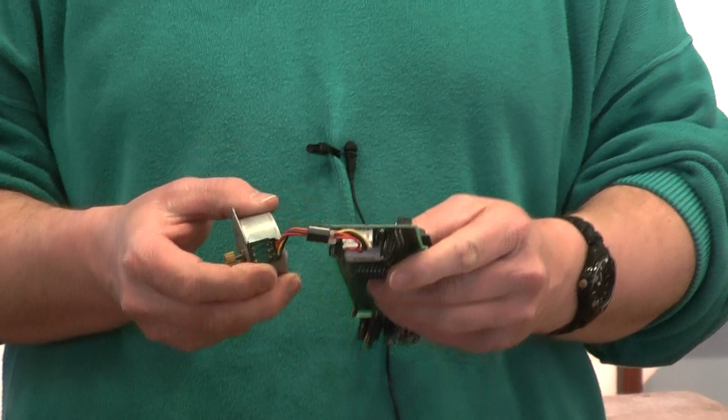Today we're going to look at stepper motors. You might find a stepper motor in your scanner. This is from my scanner, which I destroyed when I got my all-in-one printer, and I took the stepper motor out. Some things to notice: 4 wires. There are 2 phases in the stepper, and there's a plus and minus for each phase.

How do I know it's a stepping motor? Well, one simple test is to just feel it. As you turn it, it feels like there's kind of grit or sand inside of there. So I know for sure that's a stepper motor.

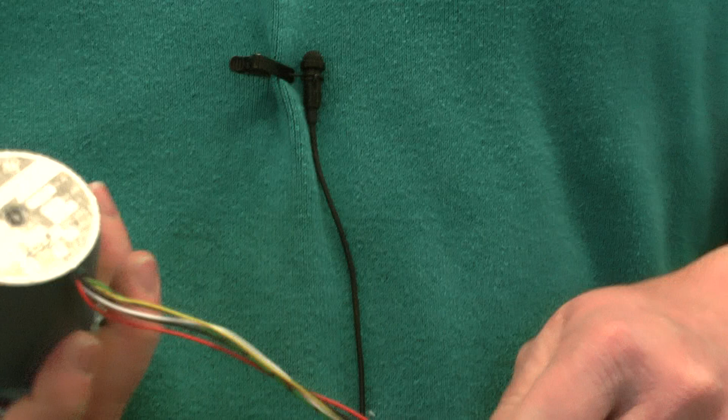For instance, this is an industrial stepper motor, and being industrial, it says on the back with its nice label that it's a stepping motor. And again, I can turn that, and this time it feels like it's got very fine sand in it. This is 200 steps per revolution, so 200 very fine steps, and I can feel those.

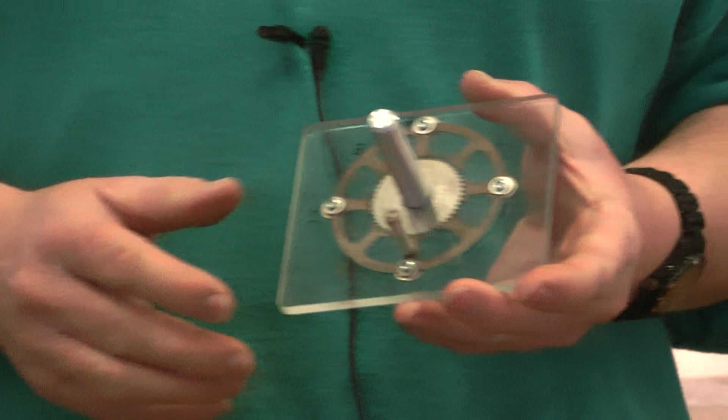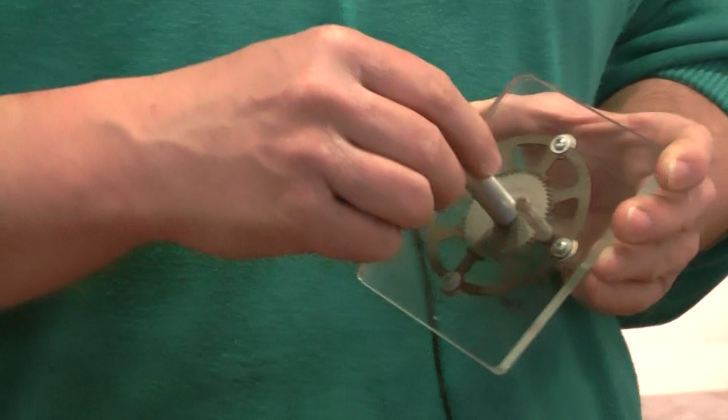Well, how is that achieved? Well, that's what I'm going to show you using this demo and the lecture notes in a moment. If I just turn this, I can feel again, it feels like sand. I've got a magnet on there. So these are known as hybrid stepping motors because they have simple poles that are energized, plus or minus, usually 2 pairs or 2 sets of those, 4 wires, and there's a magnet inside. So with the magnet, you get that sandy effect, and so I know there's a magnet in there. This is a hybrid stepping motor.

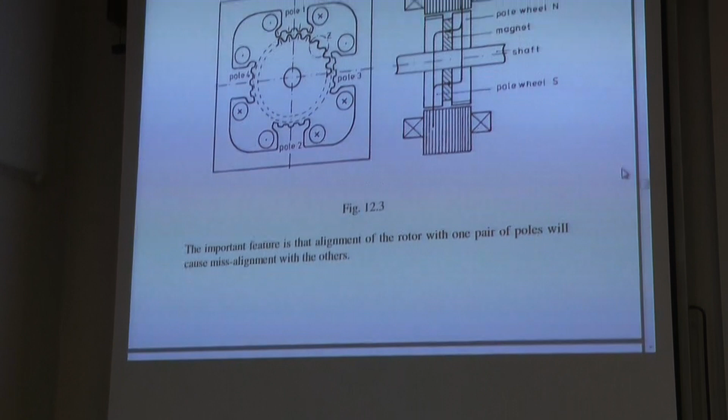Well, how is it all done? We can go to the lecture notes up there, and what you can see very clearly there, pole 1, you can see on pole 1 that it's a simple winding cross and a dot around pole 1, but the pole itself has teeth on it, and the rotor in the middle has teeth on it. And very cleverly, the teeth from pole 1 to pole 3, for example, the teeth are aligned on pole 1, but misaligned on pole 3. Remember what we said. And these little teeth, in fact, are known as castellations. Each of those poles looks like a castle, and that's exactly why it's called a castellation. And this is your classic hybrid stepper motor, which is probably 99% of all stepper motors.

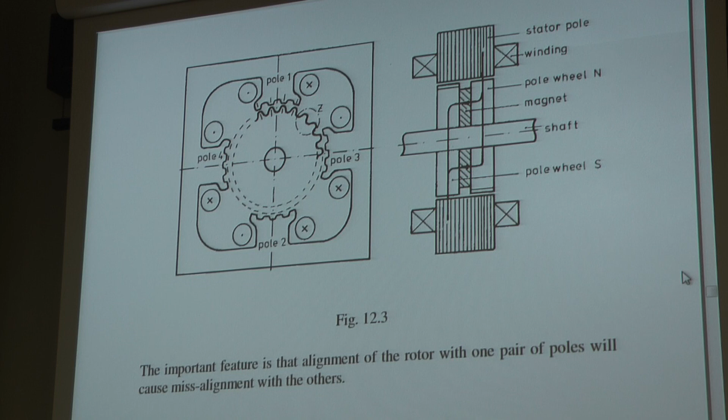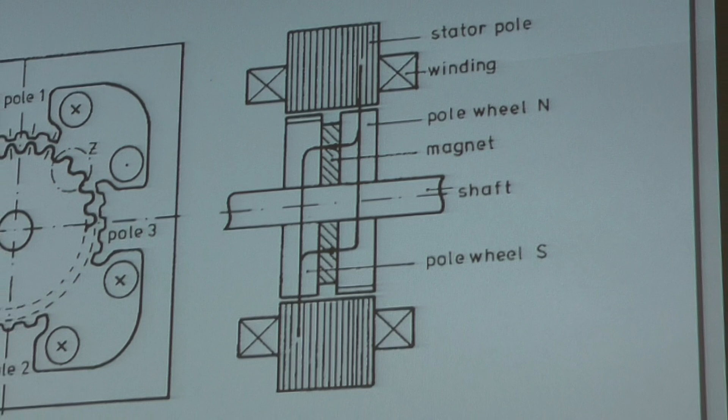Where does the magnet actually go? Well, we need to look on the picture on the right. You can see the magnet is in between the 2 wheels. There's 2 layers of the motor, and we split the rotor into 2 and put a magnet in between. The magnet is cross-hatched in that drawing. So you can see the flux comes through the pole, across the magnet, and then down the other wheel back into the pole. So pole 1 and pole 2 are phase A, if you like. Pole 3 and pole 4 are phase B, and this is your structure of your motor. And subtly you can see that there's the teeth are shown in that right-hand drawing as well. The teeth are misaligned between the 2 wheels.

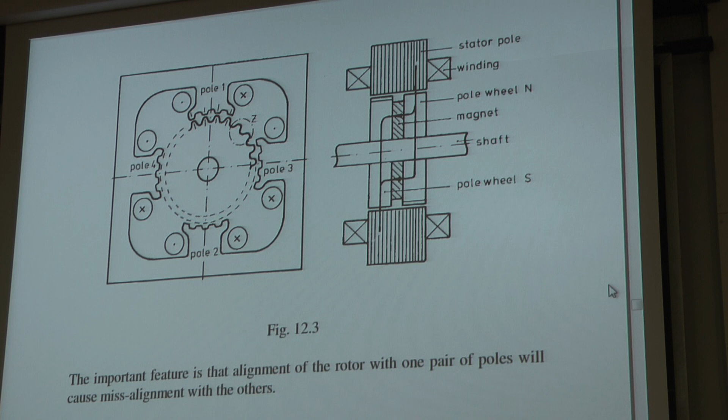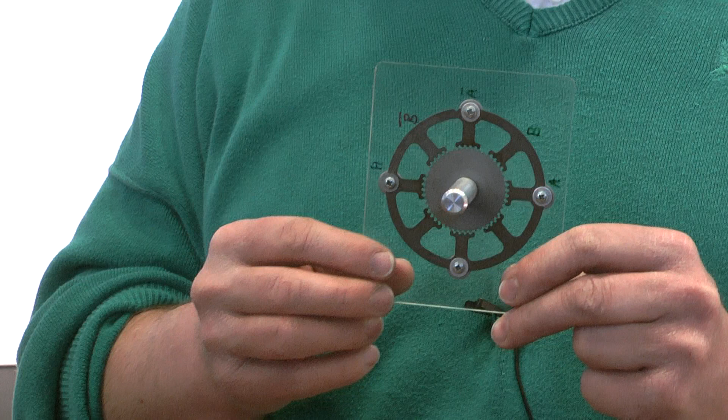Well, just to show that in a little more detail, what I've got here is a little demo I have made up. And this is what's called laminations. It's 2 very thin layers of metal. These can be stamped out, and they're stamped with an incredible level of accuracy, which is typical of stamping process, out of the thin metal, and you can see the castellations there, the poles around here. Now this has 8 poles, whereas the one up there had 4 poles, but there's still A and B, or A bar and B bar, just depending on the direction of the winding. So it's still a classic stepper motor. This, I think, gives you 400 steps per revolution, but I'd have to think about that a little bit more, count the number of teeth around there and so on.

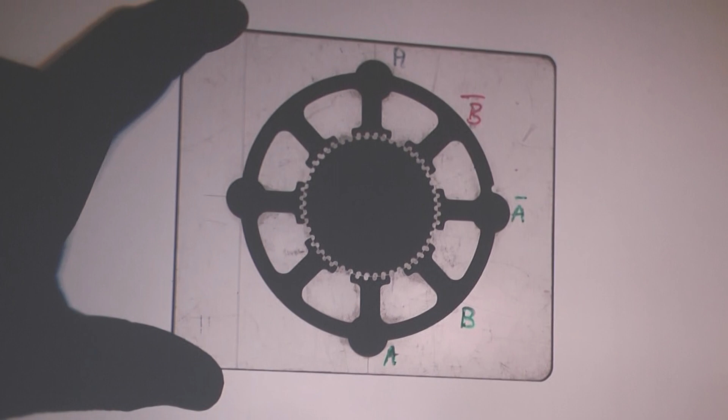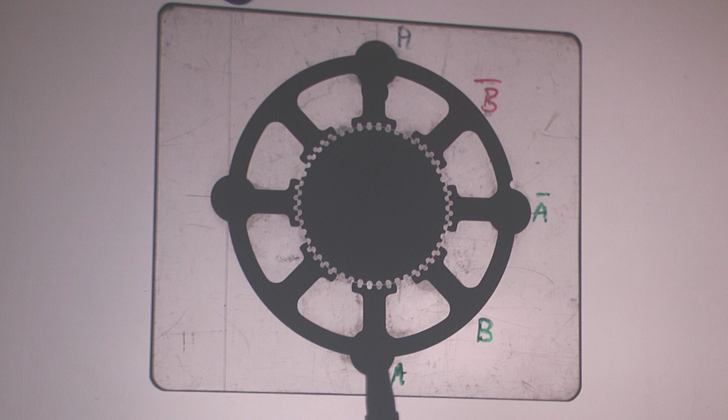Well, that's the structure of it. Let's see how it works in detail. So we can put that on the overhead projector here, and we can see through it. Well, I'm going to pretend that my little bar magnet there, my geomag, is my excitation. So I put a current in the pole and I get a magnetic field, and that brings that set of teeth at A at the top into alignment. So in fact, expanded up as much as it is, you can see that these teeth are beautifully aligned. And these other ones are misaligned around here, B bar, A bar, B, and A down here is aligned as well. So in this case, it's the flux going in on both sides through the wheel and out 90 degrees out the other side of the wheel, as in the drawing in the lecture notes.

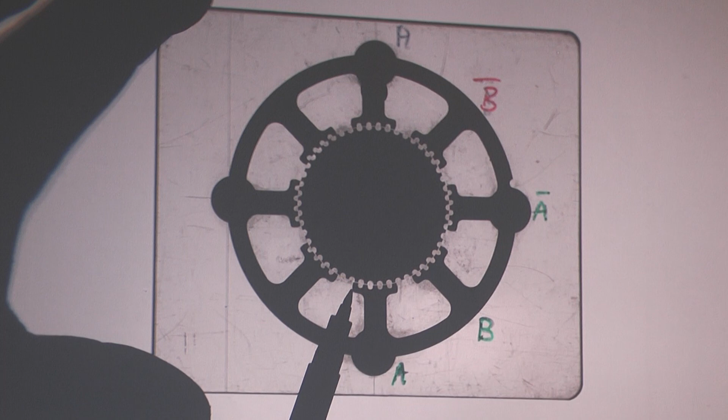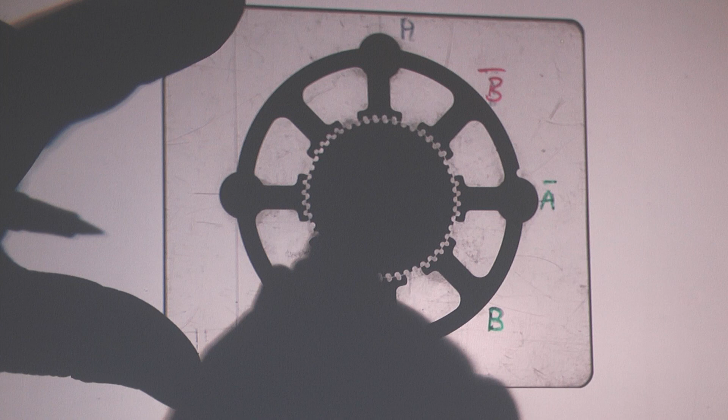So again, beautiful alignment down here. Well, how does it go around? Well, let's excite it with B bar. And you see you get a very small movement, and that's perfect for your laser printer or your scanner. And we can excite A bar, again a small movement, back to A, keep going around. So you can see we go around one revolution around here, and the middle wheel has not moved very much at all.

In fact, we ought to check that, but there we go. You can check that in your own time. Bit of homework for you.

How about that? You see the gross motion of the excitation gives us a very fine movement, and that's just what we want for a printer. Well, that's the basic theory, the basic structure.

But you know what, engineers like to do things more cleverly than that. So there's no reason why you shouldn't get another magnet, for example. Oops, whoa, that was good. I've lost my previous other magnet. And what happens if we put two on at one time?

Well, we got a small movement, but it was smaller than the movement we had before. So let's take off the first magnet. Oh, small movement again. Take that, move that back, move it forward. Now that's known as half-stepping.

So we've put magnets, or excitation as it's called, or current as it's a winding electromagnet, on both windings at the same time in a particular direction, and we get a half step. That allows us immediately, instead of just 200 or 400 steps per revolution, we can have 400 or 800. So we've instantly changed the number of steps that we can do.

Well, one of the problems is as it goes from position to position, there's nothing to really stop it going over to another position, except I'm having to apply some force, some torque to make it do that. But it doesn't know. There's nothing in the motor to tell it hasn't done that.

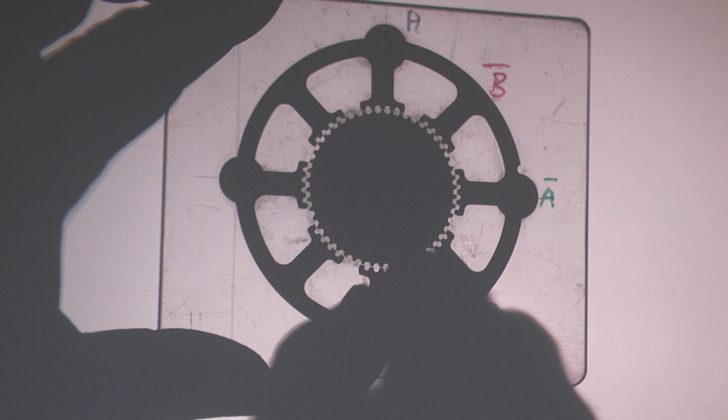Well, what about when we're moving from step to step? What if there's a resonance in the load, a mechanical resonance? Well, let's see what happens. Let's see if I can show a little oscillation as the thing pulls in line. So I'm going to spin the rotor, and then hopefully you'll see it oscillate as it comes into line.

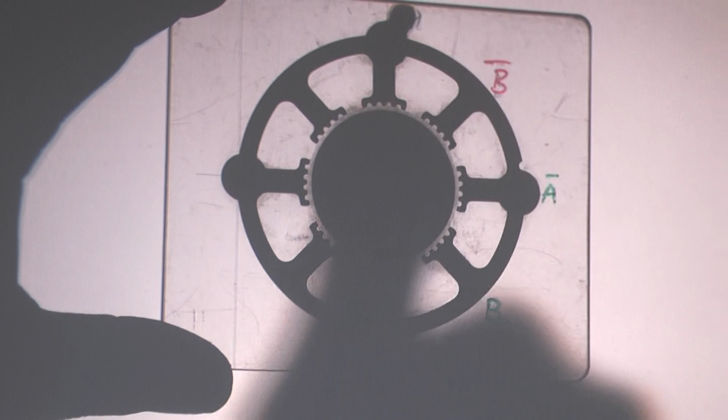Oh, didn't manage to spin it then yet. Not spinning it very well. There we go, I have to get my hand out of the way in time as well. There we go, let's do that again. What you hopefully can see is a little shake as it pulls into line. It looks quite good, actually.

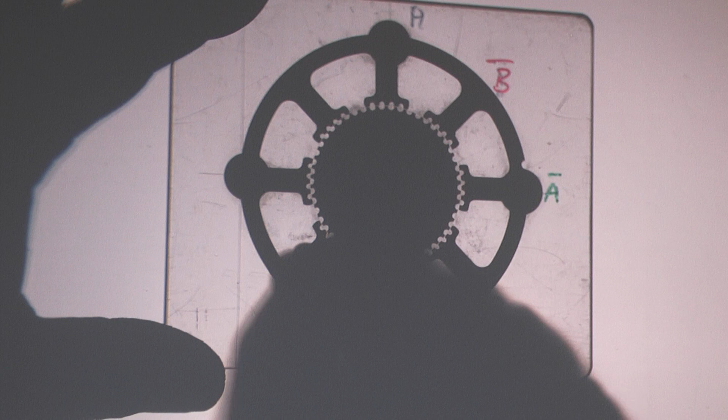It looks quite good, but you can imagine that under some conditions, as you move rapidly around here, you might hit a resonance, a mechanical resonance, and lose a step. And that's one reason why micro-stepping might be quite good, not for accuracy, just to stop mechanical resonances.

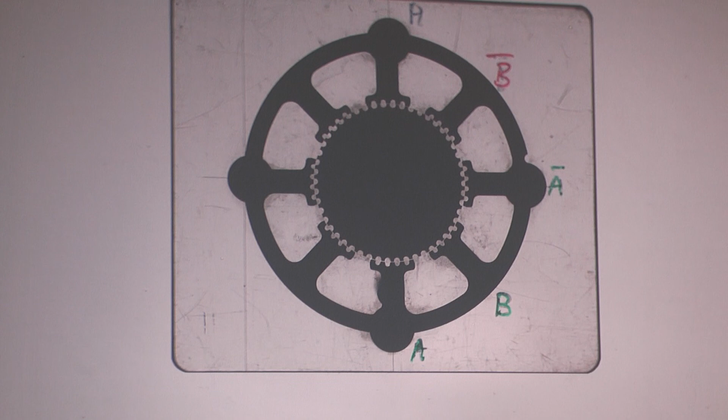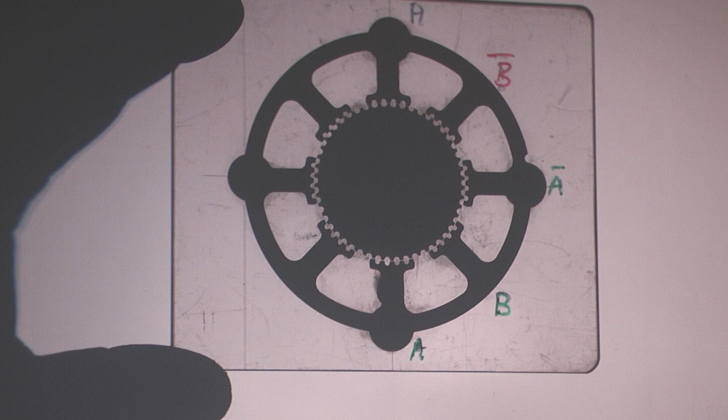It's also one reason why you wouldn't find this sort of motor in applications where the load changes. So in a laser printer, a scanner, or a knitting machine, the load is pretty constant, so we know exactly what the load is, a piece of paper or the scanning head, and we have no fear of it losing steps, losing position. But in an industrial machine tool, machining pieces of steel, this would not be appropriate because you wouldn't know the load changes. It might hit a resonance, it might overstep and go to the next one, as we tried to illustrate.

Well, that's the modern stepper motor. There are other variations on that, but that covers the majority of stepper motors. Magnets are cheap, so hybrid stepper motors are the way forward.